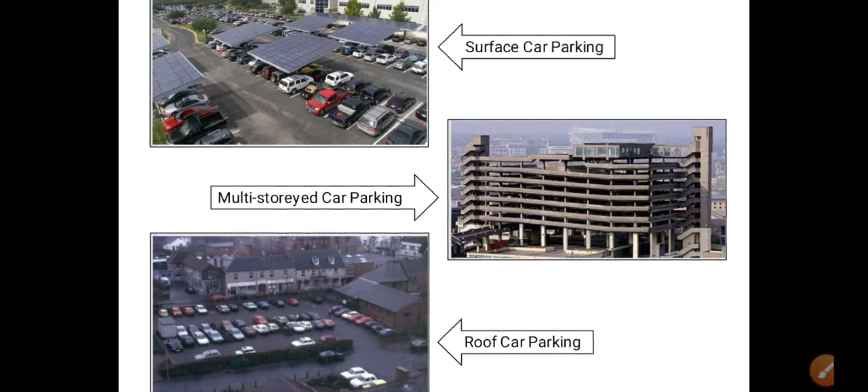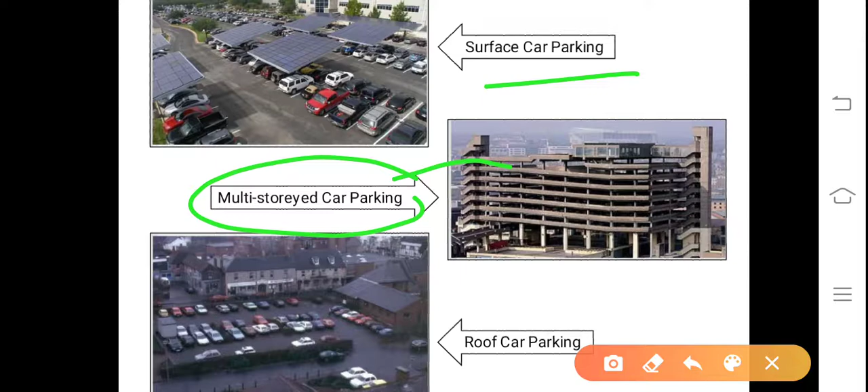Parking studies, in which lastly we have covered under parking study the different parking facilities: on street parking, off street parking. In big cities it may not be possible to allow vehicles to park on street. Thereby, off-street parking is resorted by the government, municipality or corporation, and the parking facility is created either as surface car parking, multi-storied car parking, roof car parking, or even mechanical car parking as shown here, or underground car parking. Everybody must have seen surface and mechanical car parking, whereas multi-storied car parking might not have been observed so far. If you go to big cities like Bombay, Pune, you will find that sort of parking facility also.

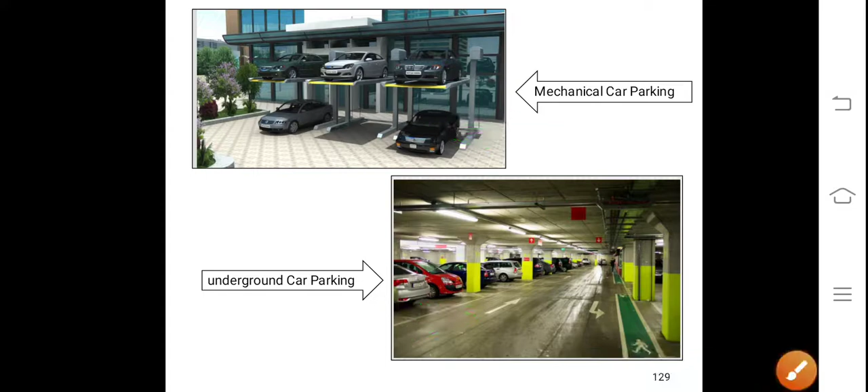Today we will continue with the highway lighting system, the last chapter in traffic engineering. This is most essential during night time driving or during cloudy weather. Even in the evening, street lights will be on, especially at intersections, at curves, at valley curves.

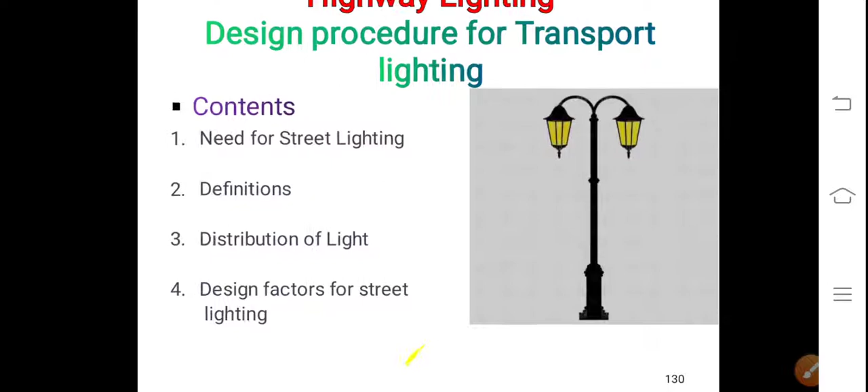Without lighting, it is not quite possible for easy vehicular traffic movements. Highway lighting design procedure for transport lighting. What are the contents under this? Need for street lighting, definitions, distribution of light, design factors for street lighting.

This is one type of very nicely looking lighting, being used in big cities. It is one form of arboriculture also, meaning in order to enhance the beauty of the roads, such good quality light arrangements are being done.

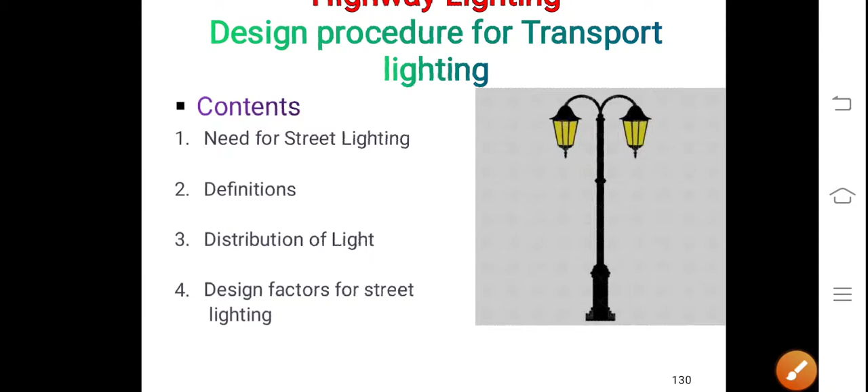Necessity of highway or transport lighting. What are the necessities? We will see. The main purpose of street lighting is to enable road users to see accurately and easily the carriageway as well as the immediate surroundings in darkness. Majority of road accidents are caused at night, and poor lighting is the main cause.

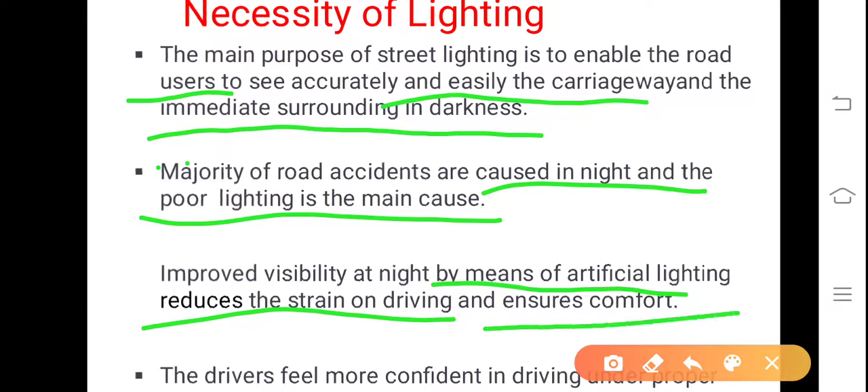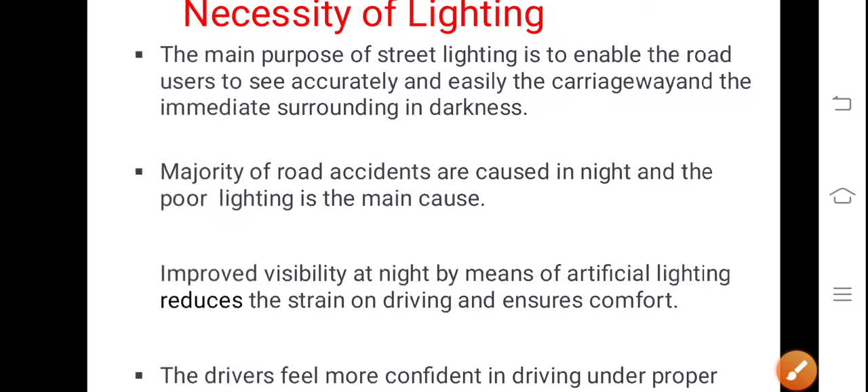Because of less provision of lighting system on highways, especially national highway and state highway, road accidents are increasing. Improved visibility at night by means of artificial lighting reduces the strain on driving and ensures comfort. Drivers feel more confident in driving under proper street lighting. With better lighting, the speed of traffic generally improves and traffic flow condition improves. Highway lighting is particularly more important at intersections, bridge sides, level crossings, and places where there is restriction of traffic movements.

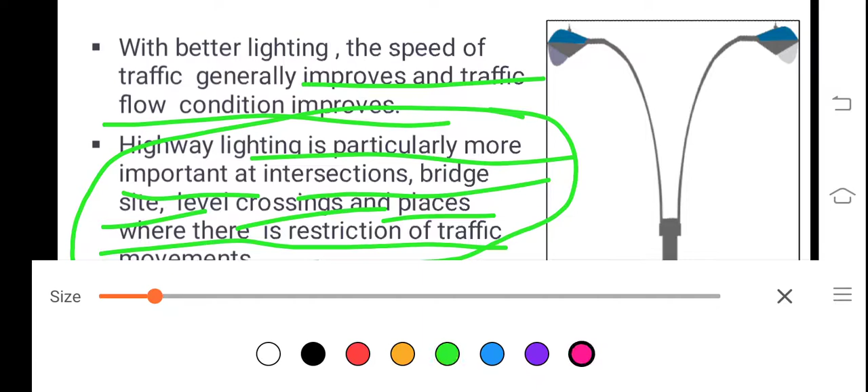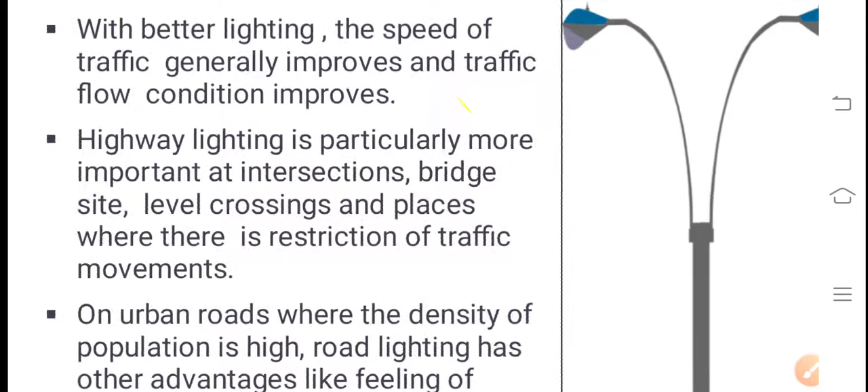You carefully understand the concept of highway lighting. Throughout the stretch of the road, it is not quite possible to provide it everywhere. At least highway lighting is particularly more important at intersections, bridge site, level crossings, and places where there is restriction of traffic movements. Highway lighting is very, very essential.

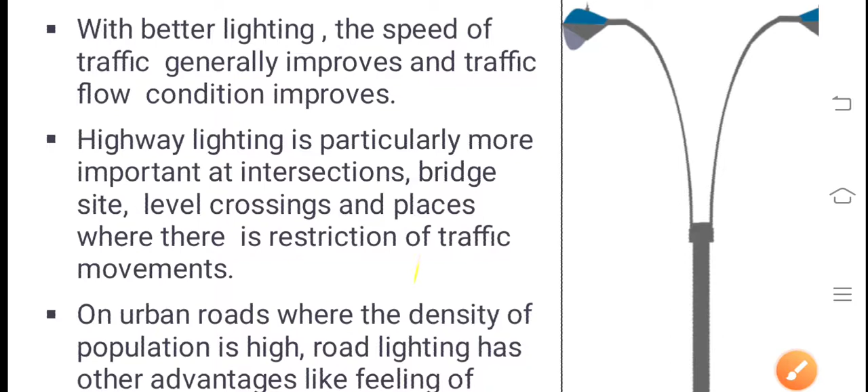On urban roads where the density of population is high, road lighting has other advantages like feeling of security and protection, especially when ladies are moving during night time. Because of insufficient lighting system on highways, undue incidences may take place that can be prevented by providing good lighting system so that all human beings will feel security and protection themselves.

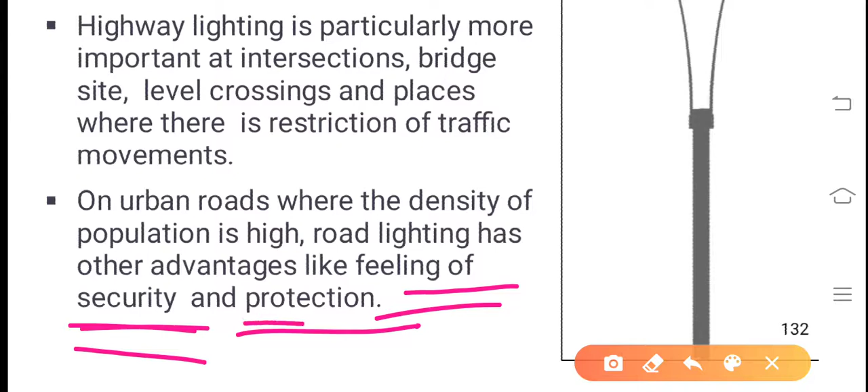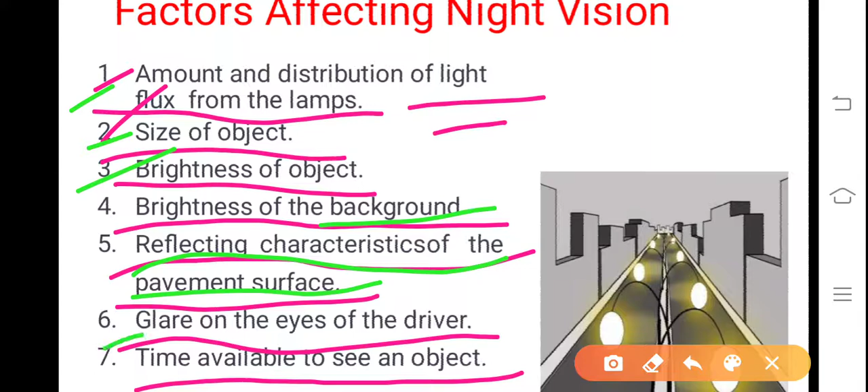So what are the factors affecting night visibility, night vision? Amount and distribution of light flux from the lamps, size of object, brightness of the object, brightness of the background, reflecting characteristics of the pavement surface, glare on the eyes of the driver, and time available to see an object. These are all various factors affecting night vision.

Further, some important terms. Steradian is the unit of solid angle. As said in the previous slide, solid angle multiplied by candle power equals lumen. It is equal to the solid angle subtended at the center of a sphere by a unit area of its surface, known as steradian. Next, luminous intensity, I - luminous flux emitted per unit solid angle is called luminous intensity. Candela, not Cinderella, Candela, is the unit of luminous intensity. Luminous intensity expressed in candelas is called candle power.

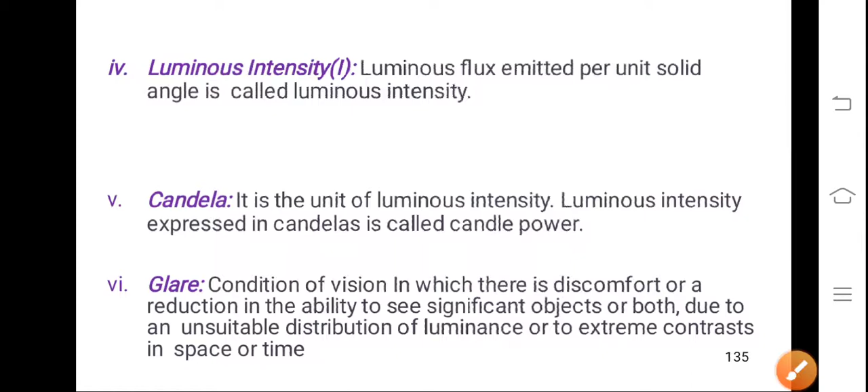Lantern, the symbol of Lalu Prasad Yadav's party. A lantern is a house for one or more lamps, comprising a body and a refractor, reflector, diffuser or enclosure associated with the lamps.

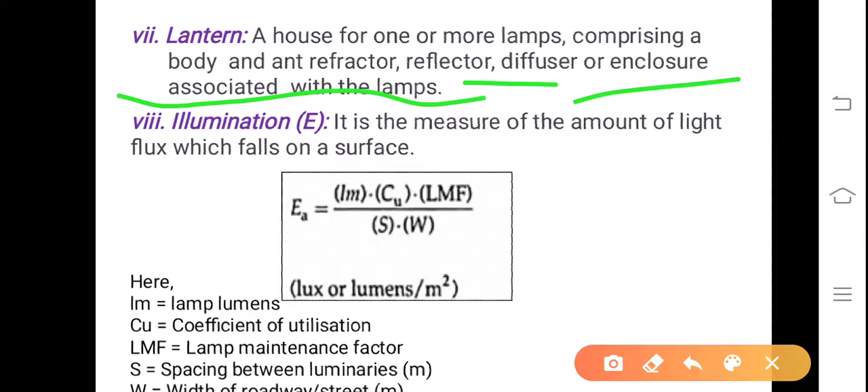Lastly, illumination E is the measure of the amount of light flux which falls on a surface. It can be calculated using the formula Ea equals Lm multiplied by CU multiplied by LMF, divided by S multiplied by W. Lux or lumens per meter squared is given as illumination E or Ea.

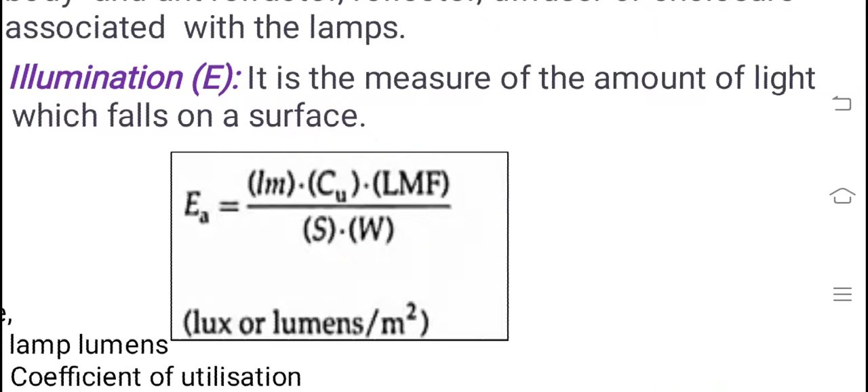What are the terms in the above equation? LM is lamp lumens, CU is coefficient of utilization, LMF is lamp maintenance factor, S is spacing between the luminaires in meters, and W is equal to width of the roadway or street in meters.

Luminance or brightness: the luminous intensity emitted or reflected per unit area of a surface is called luminance.

Now, distribution of light - how the light is distributed. The total output of a point light source will naturally radiate uniformly from the point with equal intensity in all directions. It is evident that such light distribution would be insufficient and uneconomical when the purpose is to direct the light toward a relatively limited area, such as the pavement of a street.

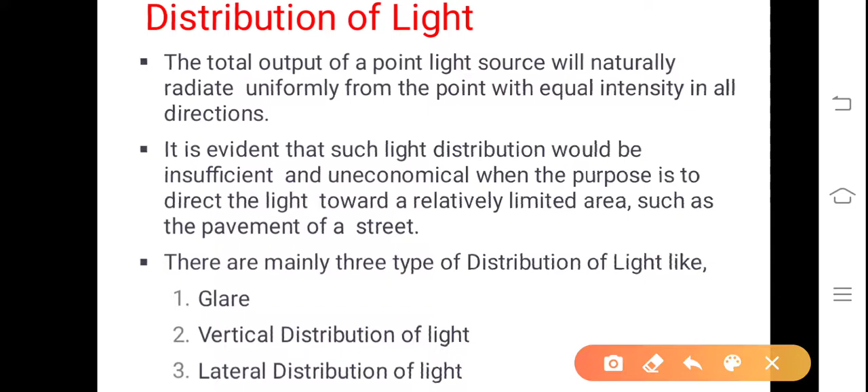There are mainly three types of distribution of light: first, glare; second, vertical distribution of light; lastly, lateral distribution of light. These are the three types of distribution of light.

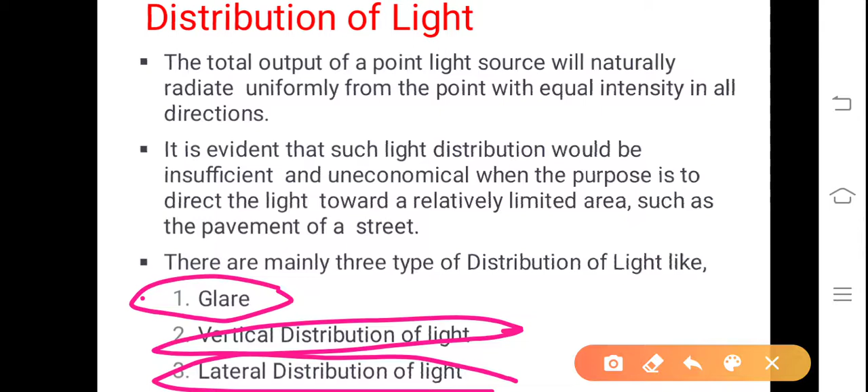Glare - the disturbing influence when viewing a difficult visual task under low brightness conditions is known as glare.

There are two types of glare: disability glare and discomfort glare. When such lights are provided, there will be glare for road users when they are driving vehicles. This should be minimized or avoided so that glare becomes nil.

The amount of glare present depends on some factors: brightness of the glare source, angle of incidence with respect to the normal line of vision, area of the glare source, and distance of the glare source from the observer. These are the four important points to be noted.

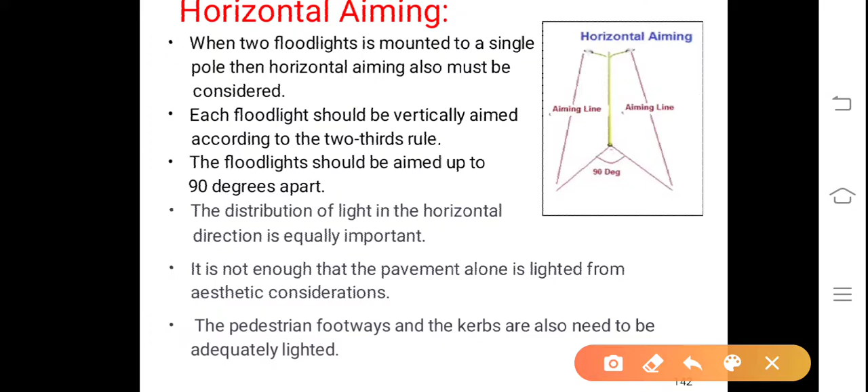Horizontal aiming - the horizontal direction of the light. When two floodlights are mounted on a single pole, horizontal aiming must also be considered. Each floodlight should be vertically aimed according to the 2/3 rule. The floodlights should be aimed up to 90 degrees apart.

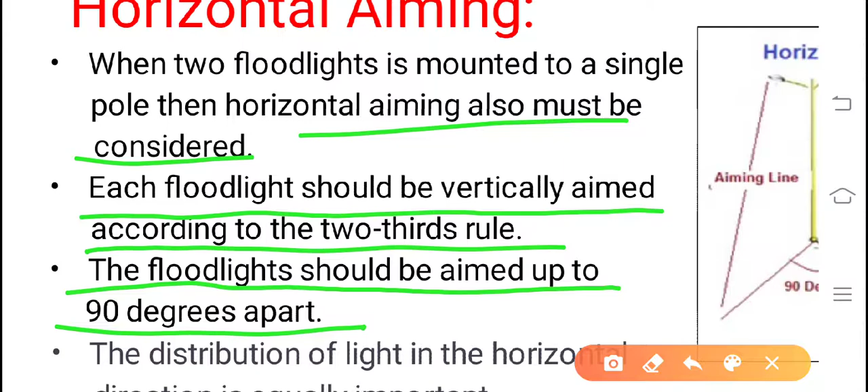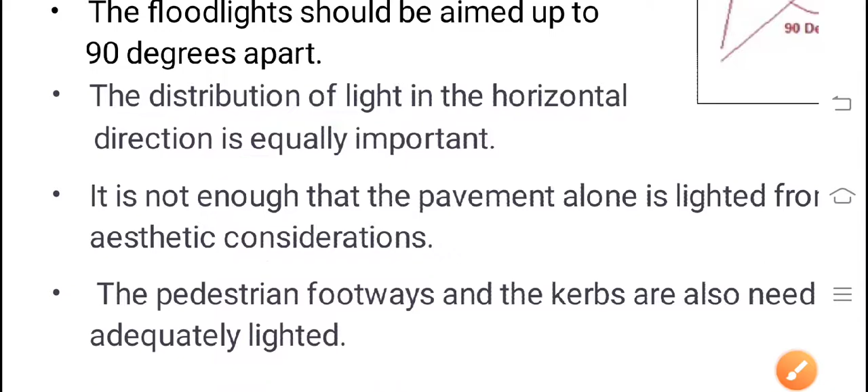The distribution of light in the horizontal direction is equally important. It is not enough that the pavement alone is lighted from an aesthetic consideration - don't think that lighting is done purely from the viewpoint of aesthetics. The pedestrian footways and the curbs also need to be adequately lighted, so we should not ignore the pedestrians and passengers.

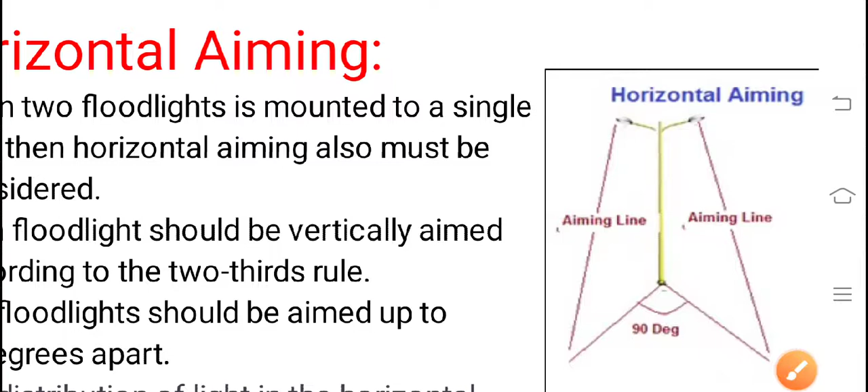This is horizontal aiming. There are two floodlights, one here and another one here. It should throw light in such a way that the maximum area is lightened. For that, there is a 90 degree angle here. In that case, if we provide these two lamps at 90 degrees, it throws the light over a larger length or width in the horizontal direction.

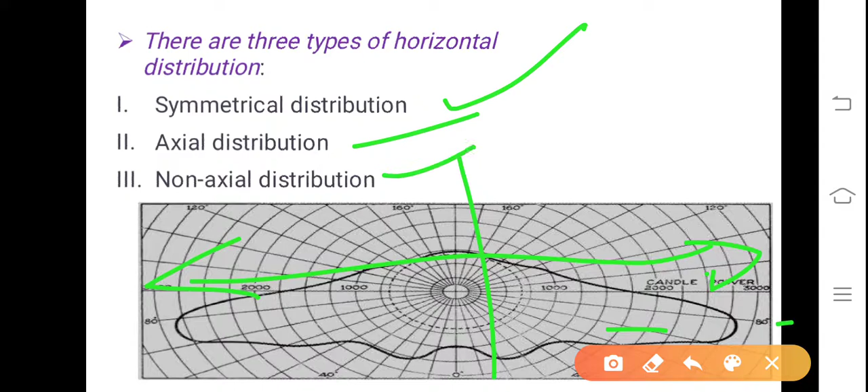There are three types of horizontal distribution: one, symmetrical distribution - you can see here it is symmetrical in the horizontal direction, symmetrical from the center; axial distribution; and non-axial distribution. These are the various alternative arrangements of lights used so that light is thrown symmetrically over a larger width and length of the road in the horizontal direction. Whenever you find free time, click and zoom individually to read and understand on your own.

Vertical aiming - the vertical distribution of light in a street light system follows one of three types. Cutoff: in the cutoff system, the light is reduced as completely and as rapidly as possible above a 70-degree angle with the downward vertical, the main beam usually being at this angle. This system eliminates glare.

Non-cutoff or high angle beam. In this case, the peak intensity is at about 80 degrees and there is considerable output near the horizontal plane. With this system, a certain amount of glare is inevitable, meaning it cannot be avoided. Modern lighting practice does not favor this system, so it should not be adopted.

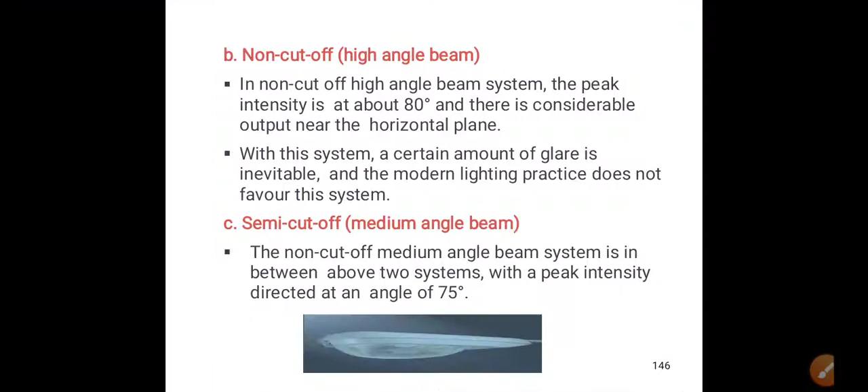Semi-cutoff or medium angle beam. This is the system in which the angle of beam is in between the above two systems, with peak intensity directed at an angle of 75 degrees. In the non-cutoff case it was 80 degrees, in the cutoff case 70 degrees. So 75 is the average, neither 80 nor 70. This is the semi-cutoff, medium angle beam system.

Design factors for lighting. Various factors to be considered in the design of street lighting are contrast, height and overhang of mounting. Whenever we are mounting lights, the overhang on either side depends on the arrangement.

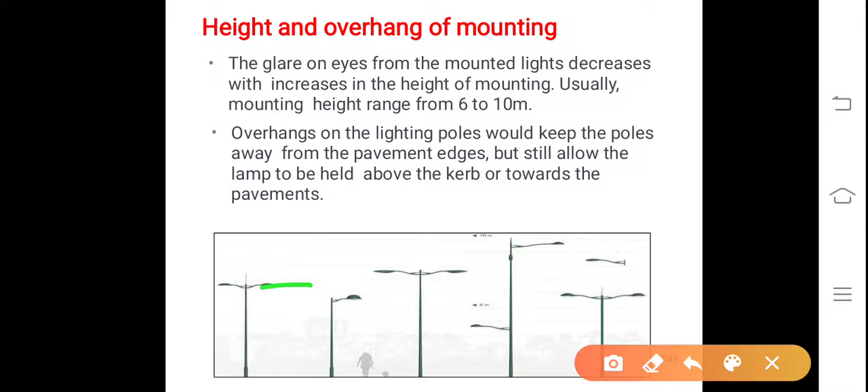Suppose this is the road, and we are putting electrical poles here, one here, in staggered fashion. Then the overhang will be only towards the pavement. From here, the overhang bulb is provided at a suitable height so that light is thrown on a larger overall area.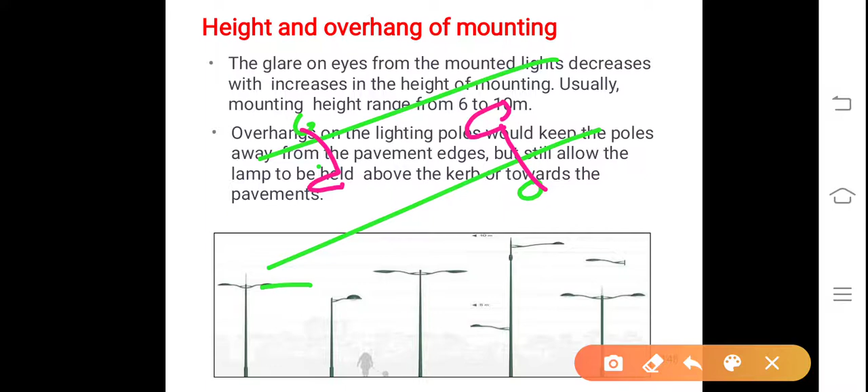The glare on eyes from mounted lights decreases with increase in mounting height. Usually mounting height ranges from 6 to 10 meters; as height increases, glare reduces, it is inversely proportional. Overhangs on lighting poles keep the poles away from pavement edges, but still allow the lamp to be held above the curb, towards the pavement. The lamp should come above the pavement while the pole remains away from it.

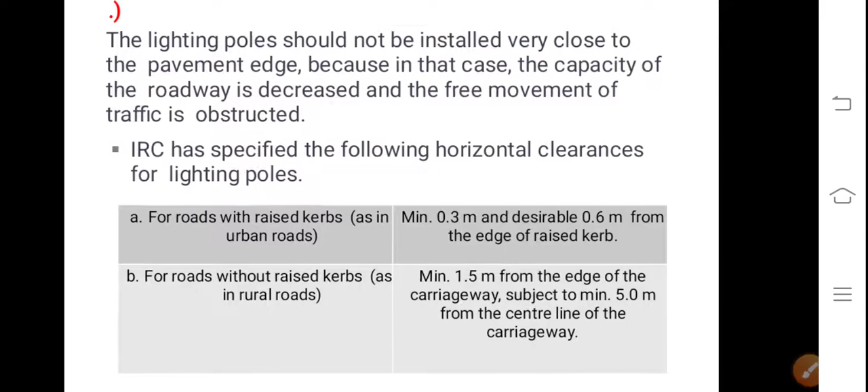Height and overhang: the lighting pole should not be installed very close to the pavement edge, because in that case the capacity of the roadway is decreased and free movement of traffic is obstructed. IRC has specified the following horizontal clearances for lighting poles.

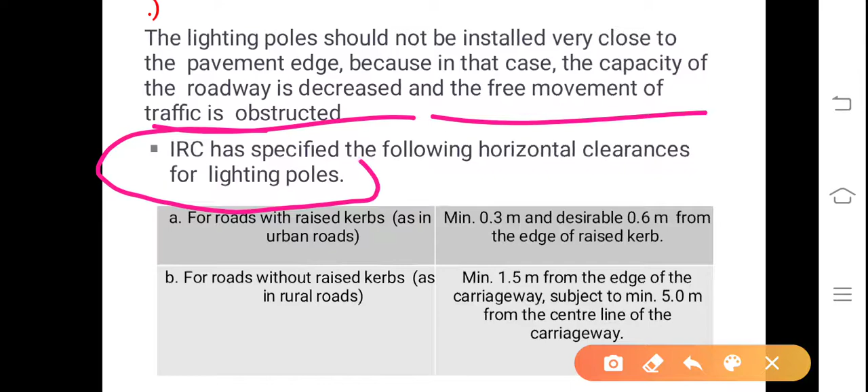IRC has specified the following dimensions: for roads with raised curbs, as in urban roads, minimum 0.3 meter and desirable 0.6 meter from the edge of the raised curb. For roads without raised curbs, minimum 1.5 meter from the edge of the carriageway, subject to a minimum of 5 meter from the center line of the carriageway.

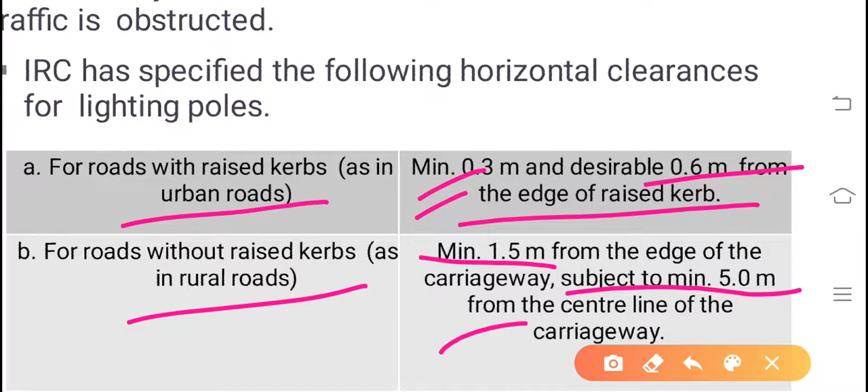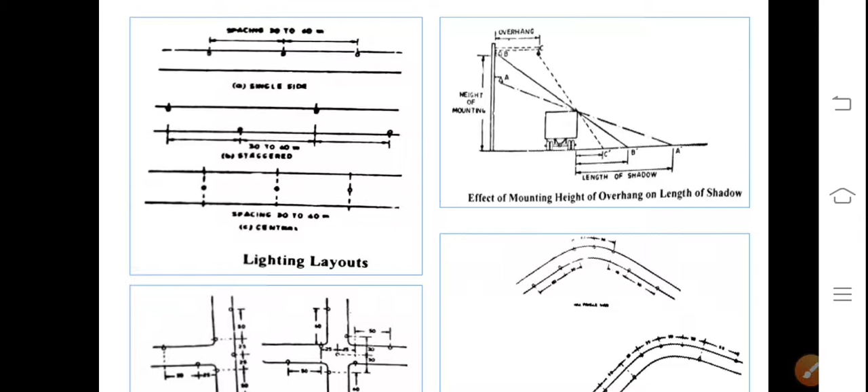These are different patterns of providing light, that is the layout or plan of the lighting system. If you consider this is the road, lighting can be done on one side itself, or it can be staggered.

Especially at intersections, the spacing between two lamps will be smaller than on a straight stretch. On horizontal curves also, if it is a sharp curve, the spacing between two light poles will be smaller than for a gentle curve.

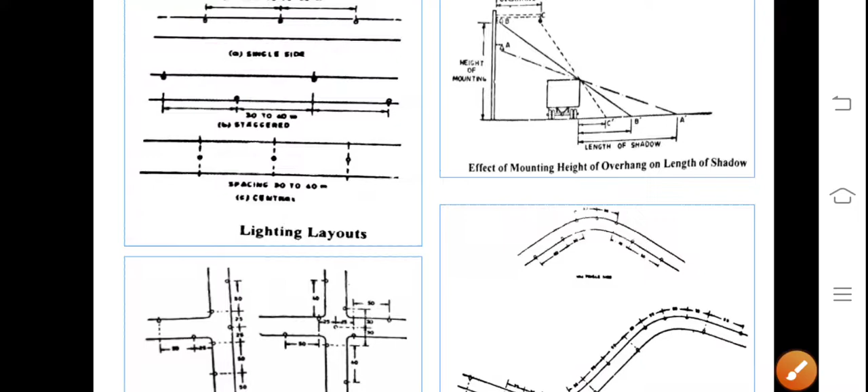So when the vehicle is placed on the road, suppose this is the mounting height and this is the cantilever portion where the lamp is fixed. Depending on the width and height of the vehicle, how much light it throws you can see - this portion comes under shadow. If the lamp is provided at this height without a cantilever, the whole area will be under shadow. That is why this needs to be properly designed.

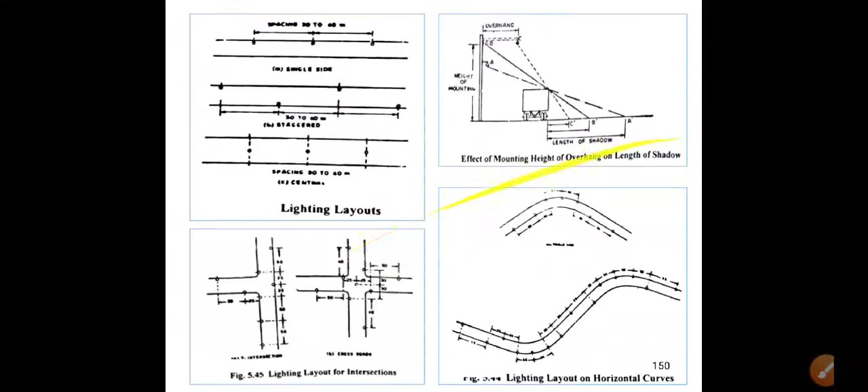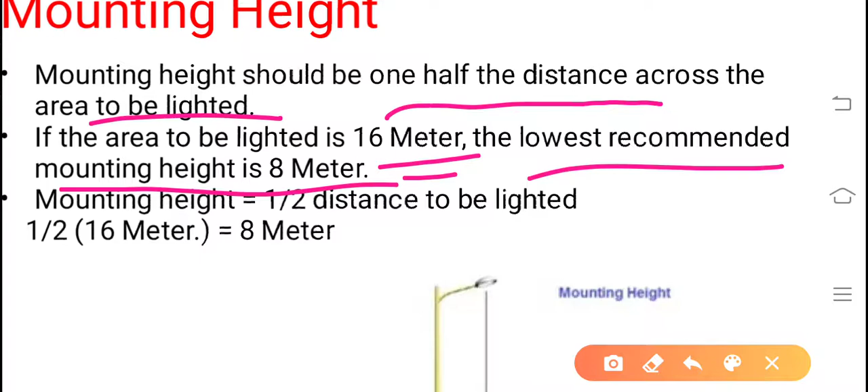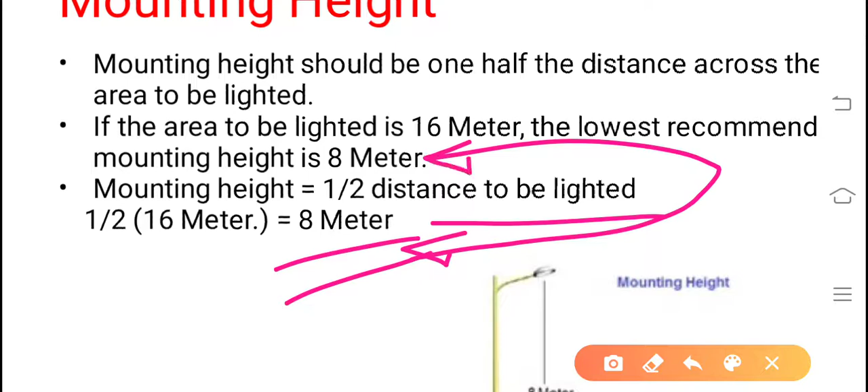This is the desirable arrangement. Mounting height is also specified by IRC: mounting height should be half the distance across the area to be lighted. If the area to be lighted is 16 meters, the lowest recommended mounting height is 8 meters, since mounting height equals half the distance to be lighted, so half of 16 meter is 8 meter. This is how mounting height is calculated, and then the light will be thrown properly.

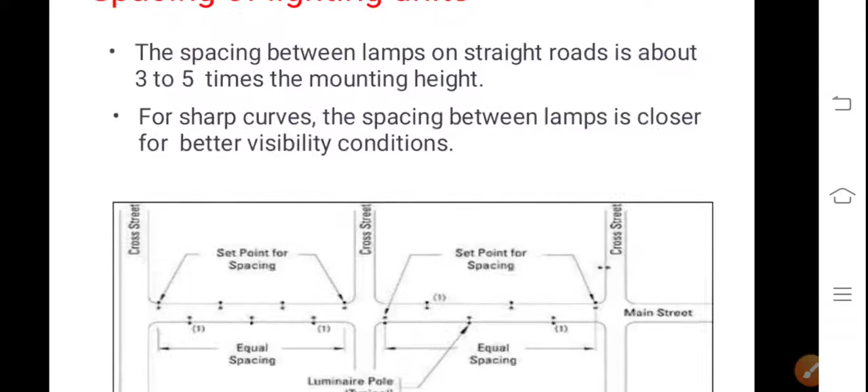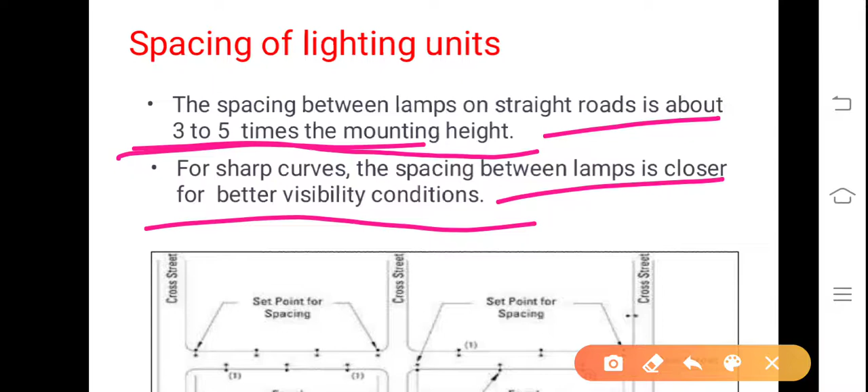Spacing of lighting units. IRC has specified that the spacing between lamps on a straight road is about 3 to 5 times the mounting height. For sharp curves, the spacing between lamps is closer for better visibility conditions, as already mentioned, it is smaller than on gentle curves or straight roads. So with a mounting height of 8 meters, the spacing would be 24 to 40 meters on a straight stretch.

Further, when more than one luminaire per pole is required, the distance between two adjacent luminaires or poles is 4 times the mounting height of the luminaire pole. Similarly, all these values have been given; you can go through and understand them gradually after class.

Now, coefficient of utilization - we may not be able to complete this in today's class. In the last class of this unit 3, we will continue highway lighting and end with the formula along with the coefficient of utilization, etc., in the next class.